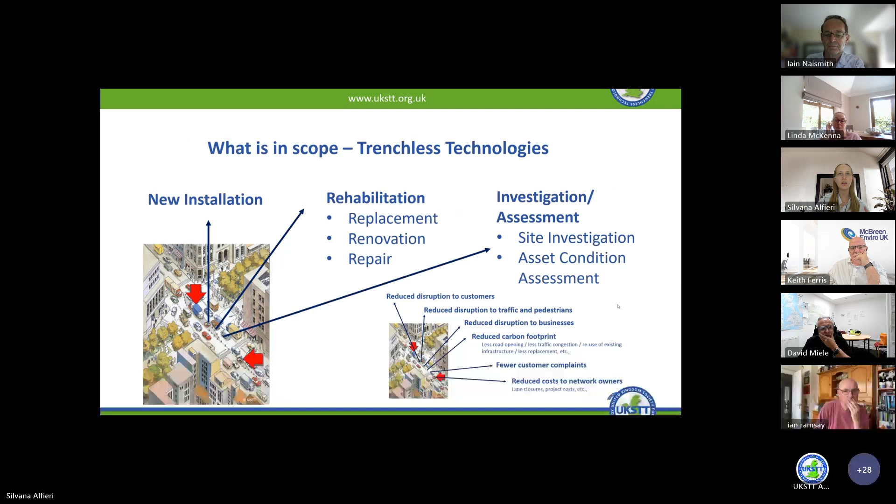So what's in scope for Trenchless Technologies? This is a very brief overview. We've done an online bi-monthly meeting on new install, one on rehab, and today will be on investigation and assessment. So what does that all include? As you can see in the smaller diagram, all these benefits of reduced disruption to customers, reduced disruption as well.

Sorry, I think someone may not be on mute. If you could please mute yourself. Thank you, I was getting a bit of an echo.

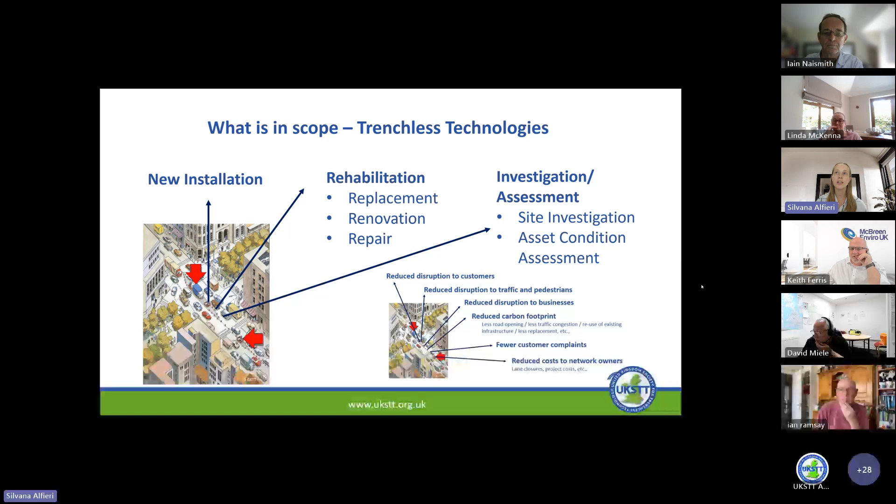Trying to think about not just the technologies, but also their benefits as well. The ISTT is the largest society that the UKSTT is part of, so this has quite an international scope. There are multiple other national societies with groups like this that we're trying to learn from and take different initiatives and ideas from. The North American Society and the Australasian Society have groups like this, so it's been very exciting to hear what they're doing. But within the UK, there's a purpose wider beyond the ISTT. If you're interested in growing your company's footprint or anything like that, the UKSTT and the ISTT are great resources for that.

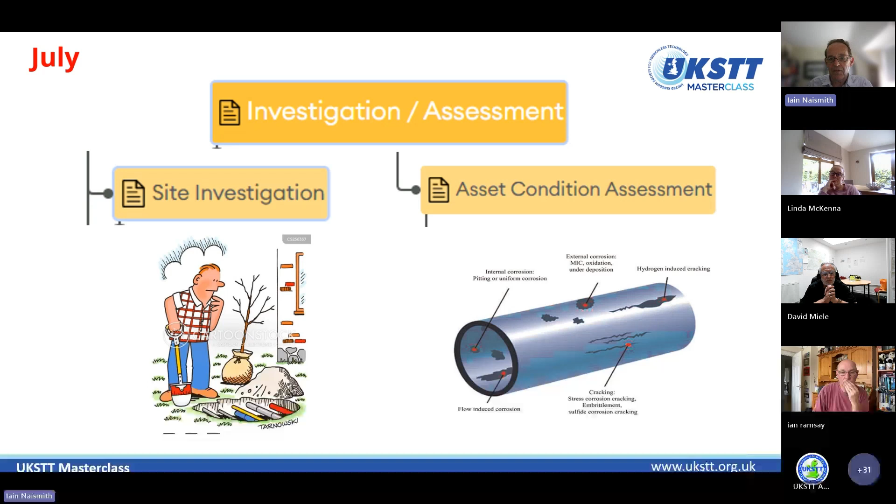One thing I'd say about site investigation, going back to our March meeting, is that it's particularly important when doing new installations - things like directional drilling, micro tunneling, and other trenchless methods for putting in a new pipe. You need to know what's there - not only the ground conditions, but where other assets are, and therefore whether it's feasible.

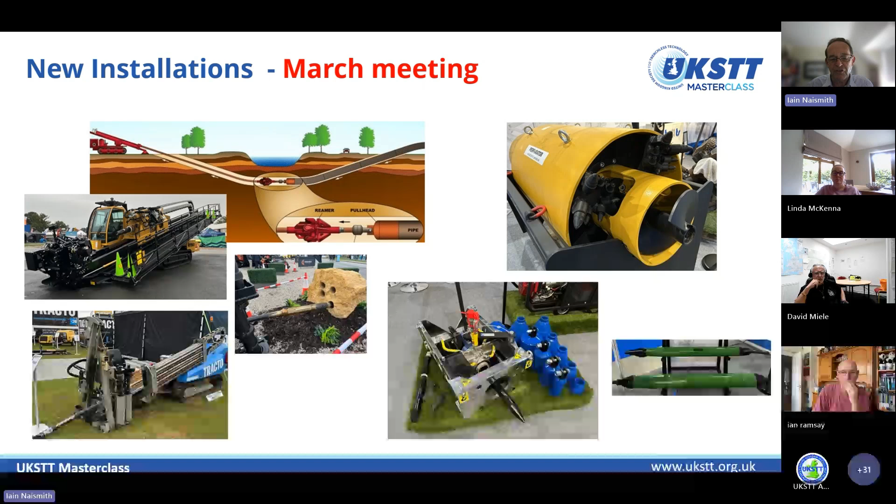When it comes to condition assessment, that is more related to existing assets, and therefore condition assessment is more about making a decision about an appropriate repair or rehab.

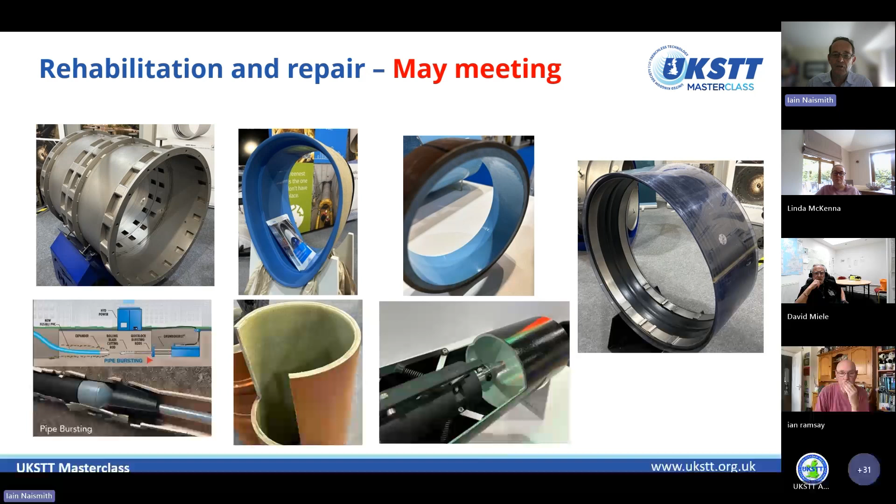Let's have a quick look at site investigation - it's about what structures or utilities are there, and what the ground conditions are. I'm going to flick through these slides fairly quickly, but they will be shared afterwards, and you can use the ISTT website to keep yourself up to date.

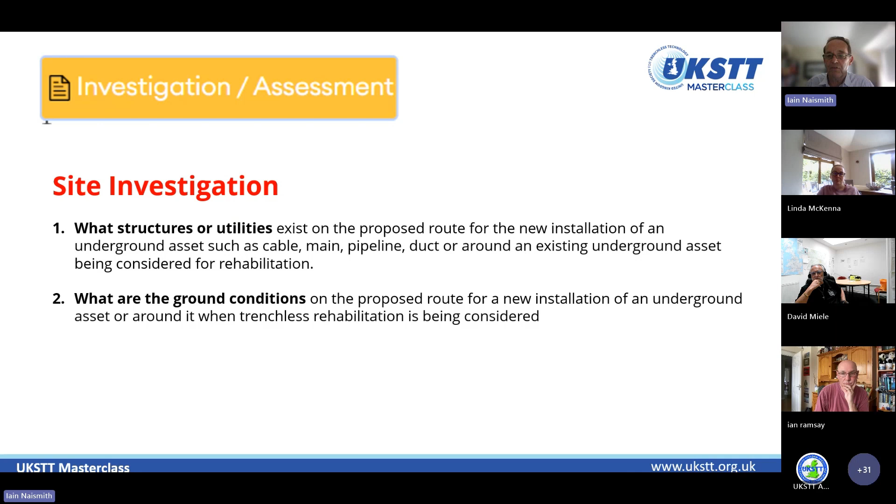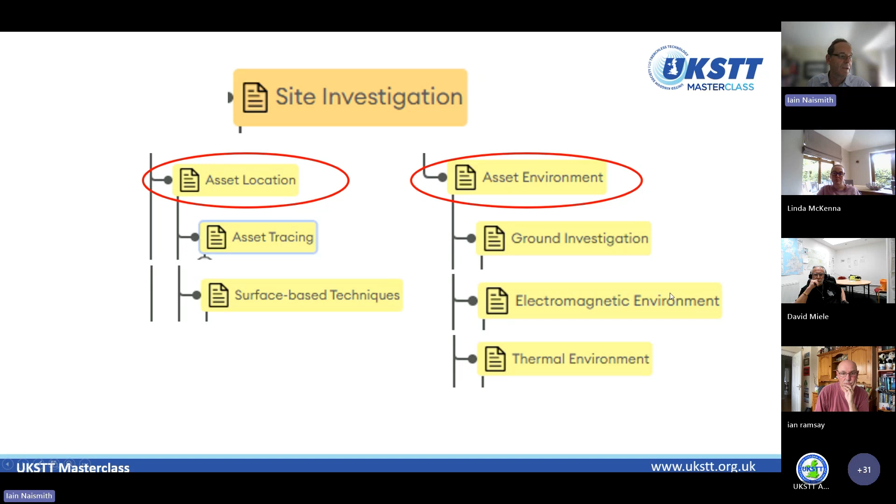When we look at site investigation, using the drop down on ISTT takes you to asset location and asset environment. The technologies are divided up under these two subheadings for site investigation. The first one is asset tracing, and there's a whole variety of methods which are possible.

Essentially we're looking at sonde techniques, where you might attach something, say, to a camera, which can determine its vertical and horizontal position as it goes through a pipe. We've also got impressed signal techniques, where you create a signal from within the pipe and detect it from above. There's a whole variety of further internal survey techniques for determining location and tracing.

We'll be hearing a bit about that when we hear about drones, for example. And don't forget smoke and dye testing - I've used dye testing to try and work out where a sewer connects into a stream before. You can also use smoke detection. So there's a range of perhaps expensive and complex, or relatively cheap, solutions.

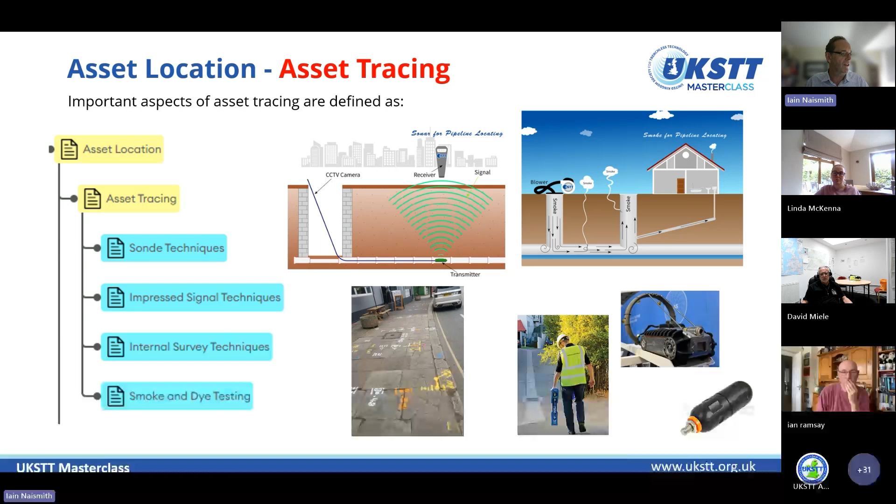So we're looking initially at asset tracing from within, but let's not forget we can search directly from above as well - we've got ground penetrating radar, seismic or sonar techniques, and a few additional methods you'll find on the ISTT website.

Let's not forget, say we're going underneath a river with a new installation - we want to know something about this water body, so we're actually tracing, in this case, where the surface of the ground actually lies. We've got a variety of other ways using seismic or electromagnetic signals to determine what is going on, and remember, at this stage, we're talking about finding where things actually exist.

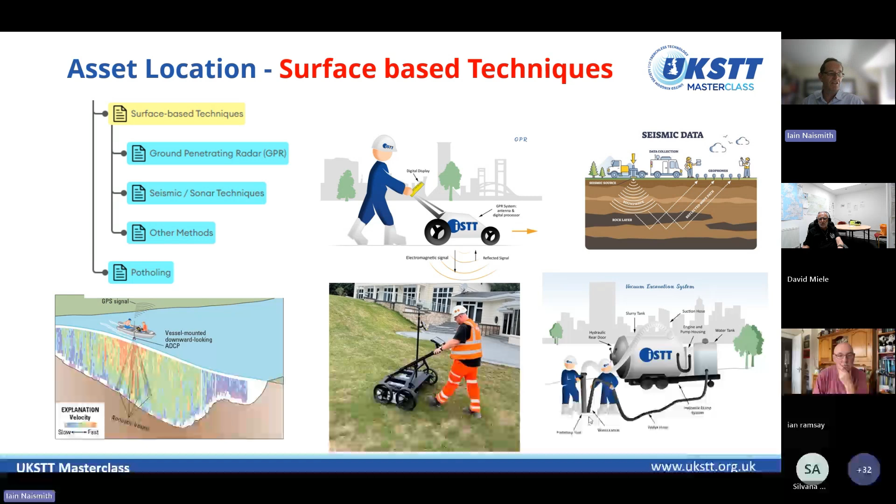The ISTT has included potholing or keyhole as a method of getting in to find the location of an asset, going down with something quite small - so it's less trench, not trenchless - to locate where something is.

If we then look at asset environment, ground investigation - we've got geophysical, geochemical. Let's remember we're interested in the chemistry because it may determine what type of pipe product can be used, and it may be necessary to do some soil sampling to come up with the answer. So here we're potentially looking at things like coring to understand what is under there, and this will determine where it's perhaps safe or easy to undertake a trenchless technique.

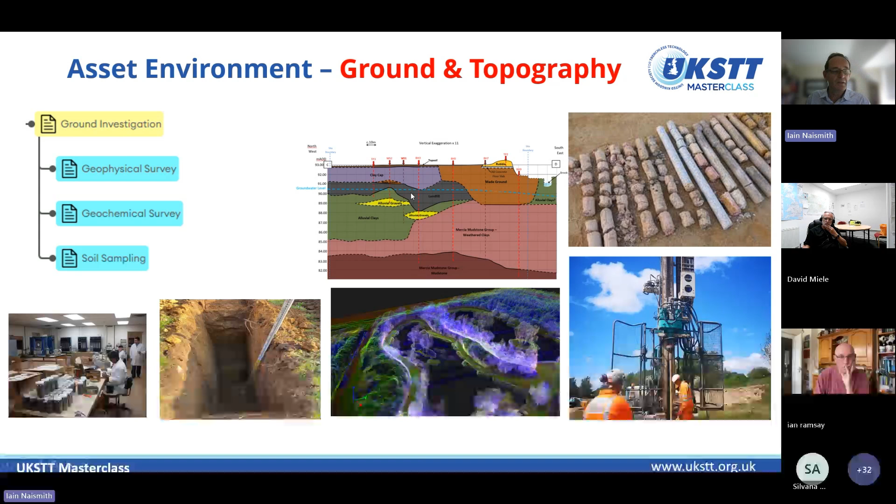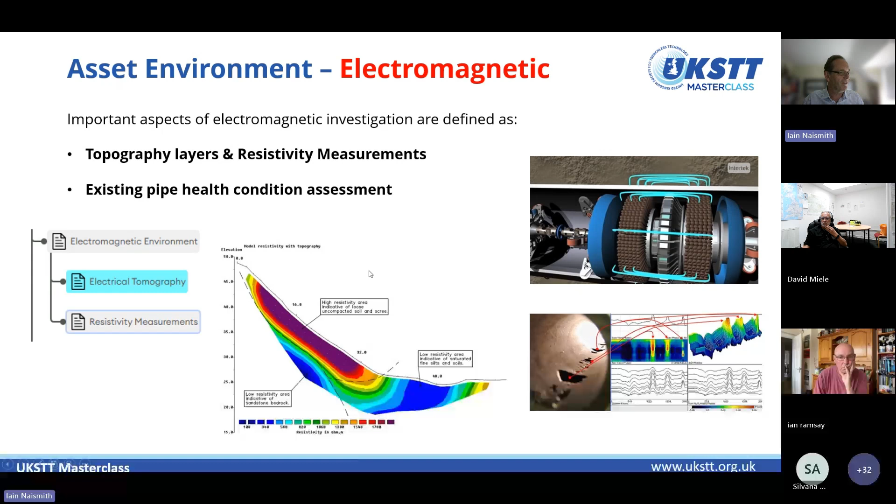So just a little bit more detail on this. We've got things like electromagnetic survey, which allows us to both do topography, but also to do perhaps some assessment of the condition of the pipe. And this can be done from the inside and from the outside of the pipe.

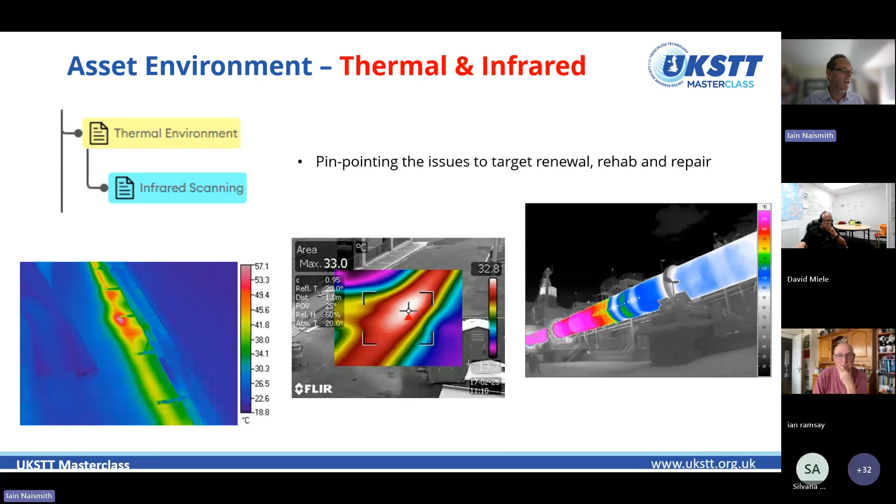Still under this site investigation, the ISTT has groundwater monitoring. It can be an extremely important element of this. It may be that you actually need to install additional wells in order to monitor groundwater, particularly if you're dealing with a particularly severe infiltration issue, and you want to choose a time of year when conditions are best for doing the work.

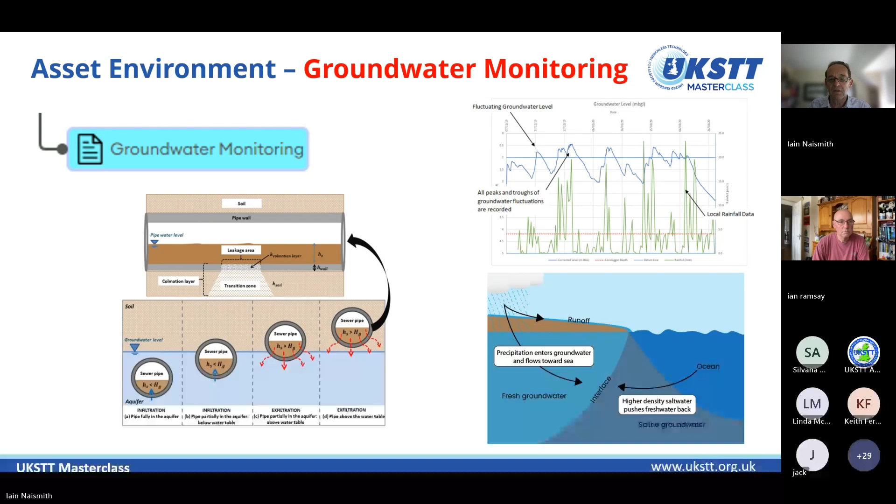And you can put all of this together into mapping. Let's just remember that you can use multiple techniques to come up with the answer when investigating a site. It could be that you're looking at something which is many kilometers long - don't forget that when you look at some of this mapping. A variety of techniques in order to locate where existing assets are, but also to identify what the conditions are if you're planning to lay something new.

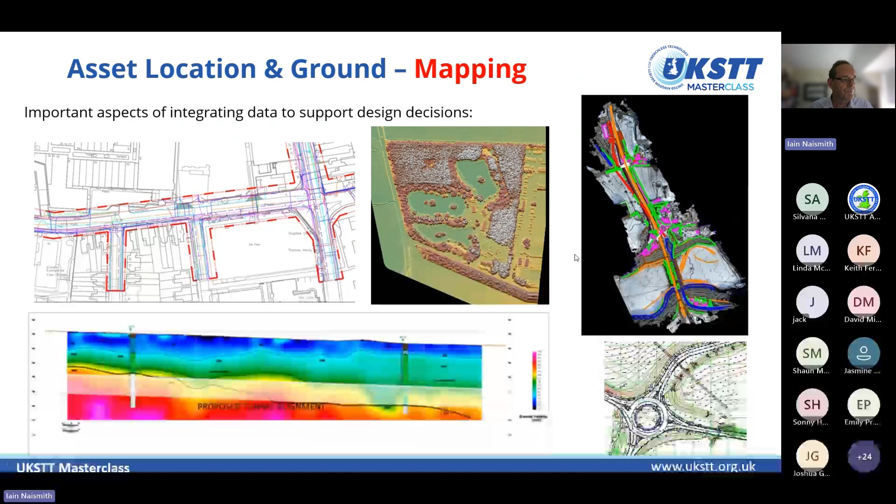structural condition assessment, and operational performance. Let's not forget at the end that you might want to know how the asset is performing as well as its actual structural condition. So is there infiltration? Is there leakage going on, for example?

So the scope of condition assessment is quite wide. Maybe the most common one, of course, is collecting and interpreting visual images. But increasingly now, people are realizing that visual images alone are not necessarily everything you need, and that there may be other ways, rather than making it visual, of recording data and information. So let's just be aware of that.

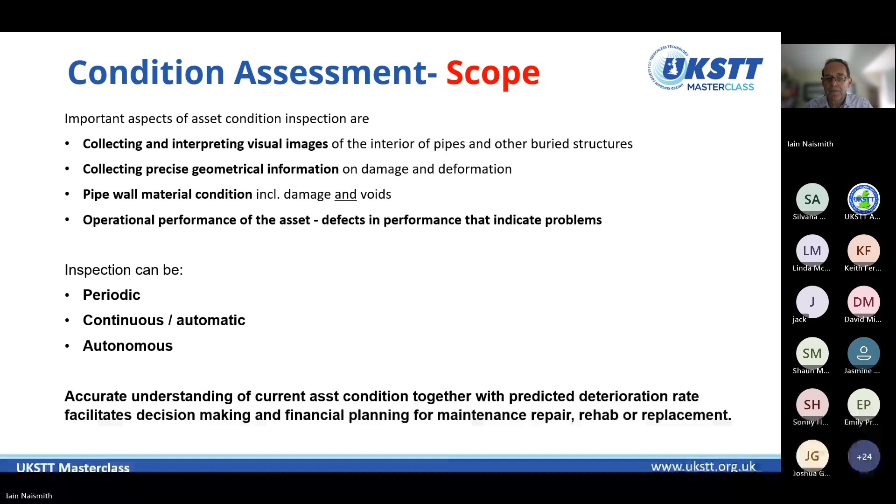So if we look at condition assessment more generally, we start off with the inspection application. The choice of method you are using will very much depend upon the purpose of the inspection, but also the type of facility the inspection will take place in. By type of facility, I mean what material it is made of, what are its dimensions, what is it carrying.

Something often suggested, and highlighted by the ISTT, is a preliminary investigation. Budgets are limited, so it may be necessary to do something simple as a quick look, which then might lead into a decision about a more detailed condition assessment and use of perhaps more expensive techniques to help justify why you might do it.

So the most commonly used method at the moment is CCTV. And CCTV, of course, comes in various forms. You can do large diameter inspections, and you can also do very small inspections using push cameras.

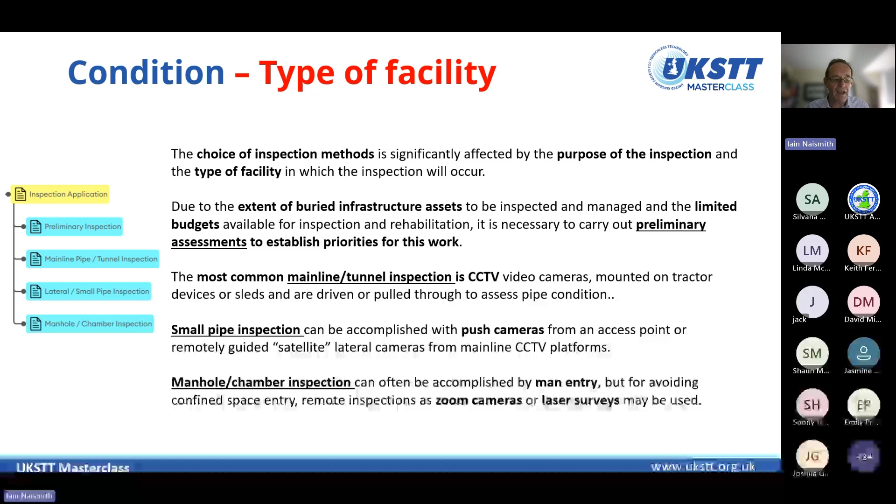One or two of the water companies are starting to think that way and starting to invest in equipment to allow their staff to do that. So looking at these, we've got visual laser inspection - CCTV, zoom cameras, nozzles, and laser and LiDAR. In the following presentation, we're going to hear a little bit more about the use of LiDAR.

Normally you're looking at something like visual images or line of sight scanning methods, and usually an operator will be in direct control, but as I mentioned before, increasingly we're starting to see automatic data capture and more AI coming into this, which is something we need to bear in mind. I think this whole condition assessment area is where AI, as we know it's been developed for CCTV, is going to help control the way in which the actual surveys are carried out.

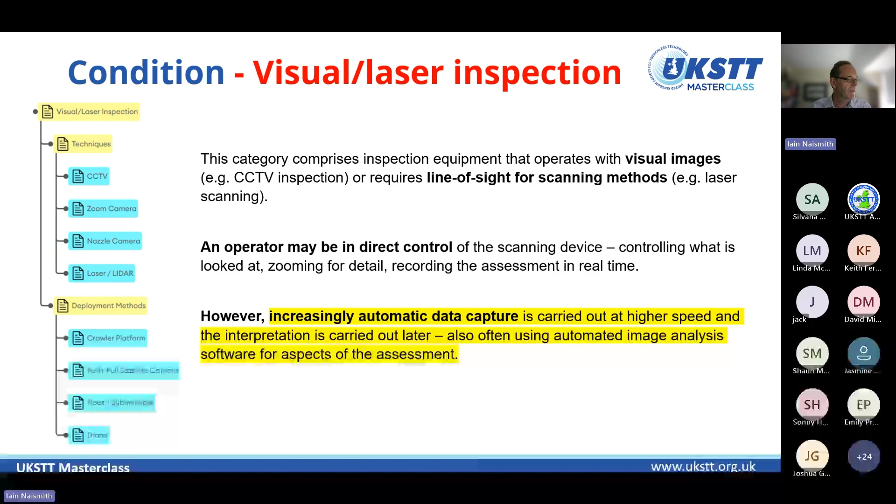So with CCTV, basically you've got a camera and some form of transport for that camera, connecting cables, recording equipment, monitor, software, capturing what has been seen. Either the operator or artificial intelligence can be used to create the coding and the records.

You may require some pipe cleaning before CCTV inspection. Let's bear in mind, cleaning is here in this particular list, but it is and can be an essential prerequisite for undertaking a condition survey. And just another point here about lighting - with visual it can be a key issue, but not so with other types of survey.

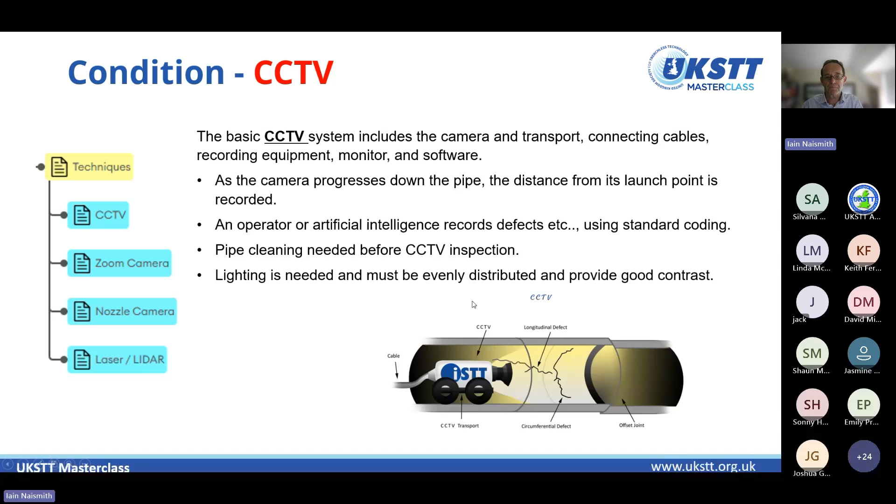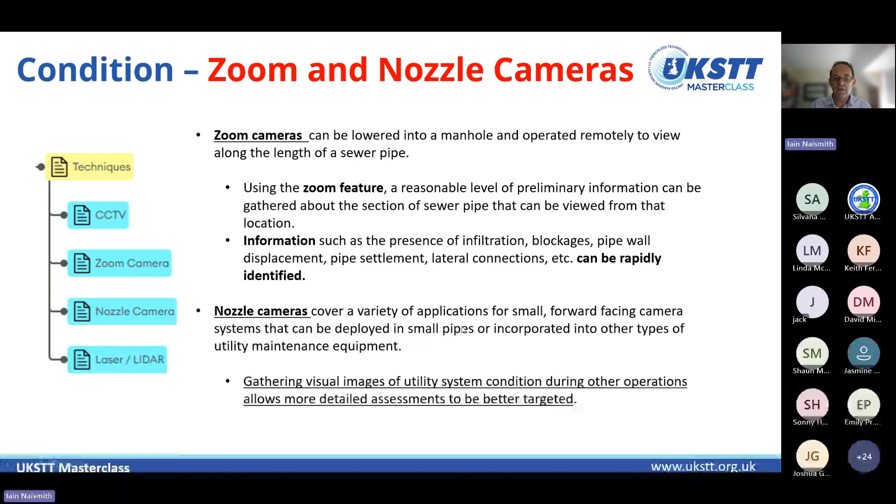With the zoom cameras, I've already dwelt on this, but they get a specific mention here, and it does allow preliminary information to be gathered. It might tell you there's some infiltration, some blockages, pipe wall displacement rapidly identified, but you can really only look from a point of access up and down - you would need something else to get round a bend. These small forward-facing nozzle cameras, which can be pushed through, are also given a separate entry within here.

And when it comes to laser and LiDAR, this is particularly helpful for pipe dimensioning. I've mentioned earlier about locating the position of the pipe, which we need to do, but actually using laser LiDAR in order to get a very good profile - the dimensional analysis will allow you to design a solution, particularly if you've got things like changing diameters or unusual geometries partway along a pipe section.

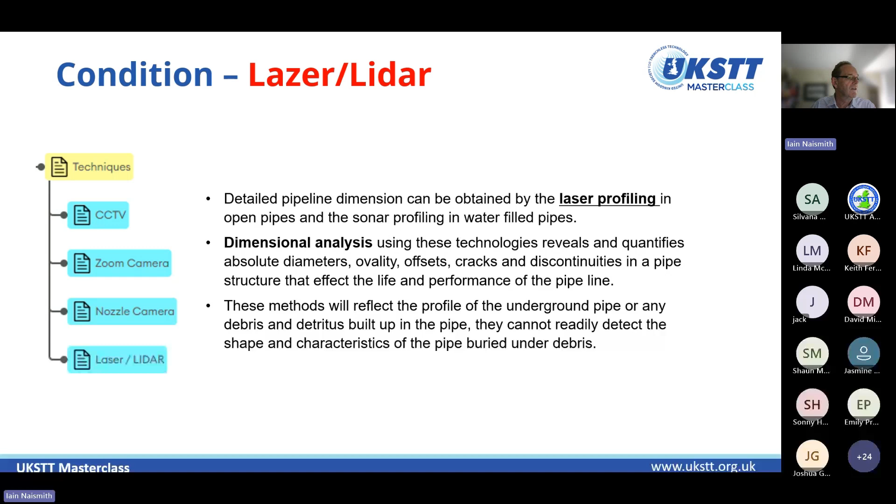With both the visual and the laser, just a reminder that there's a whole range of platforms upon which they are carried, and this is something you need to think about. It's all very well that we've got a survey method, but how are we going to deliver it?

We've got the crawlers, the push and push-pull inspection, satellite cameras - so you're trundling down a main pipe using your camera, and you see something in a small lateral which you want to look at, a little satellite camera can go off and have a look up that. And let's not forget the floating platforms, which can be used. There are now submersibles - we think a lot about floating, but there's submersible drones for getting down under the water level and looking in structures, say, for example, big underground tanks.

Drones flying through - we're going to hear about the autonomous element of it. So will it be possible to have autonomous floating boats, drones where increasingly AI is being used to help fly them? So autonomously flying drones and autonomously moving robots.

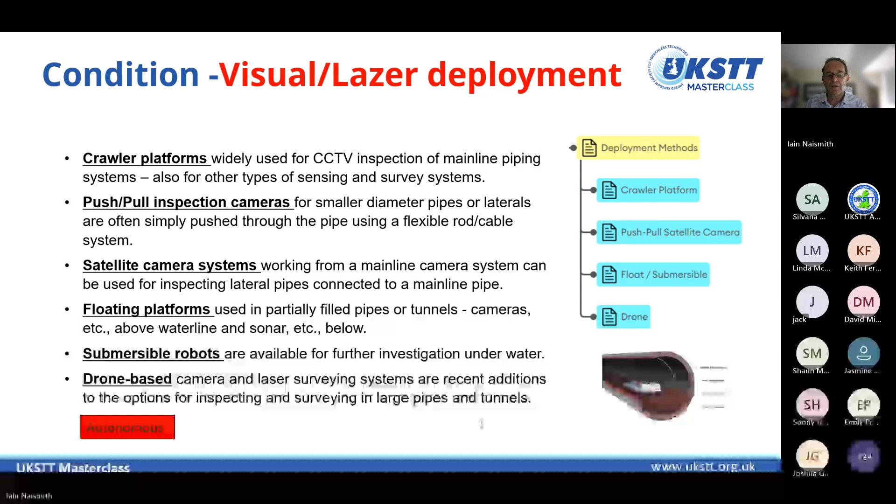So much for the visual. We've then got structural. Under here, the ISTT divides it into wall condition and thickness sensing, structural sensors, and determining external voids. It's one thing to know what is happening with the pipe, but to know if there is a void around the outside of it, which is either influencing and causing a problem, or could potentially cause a problem and therefore needs to be fixed, is an important part of it. So it's going beyond the pipe itself.

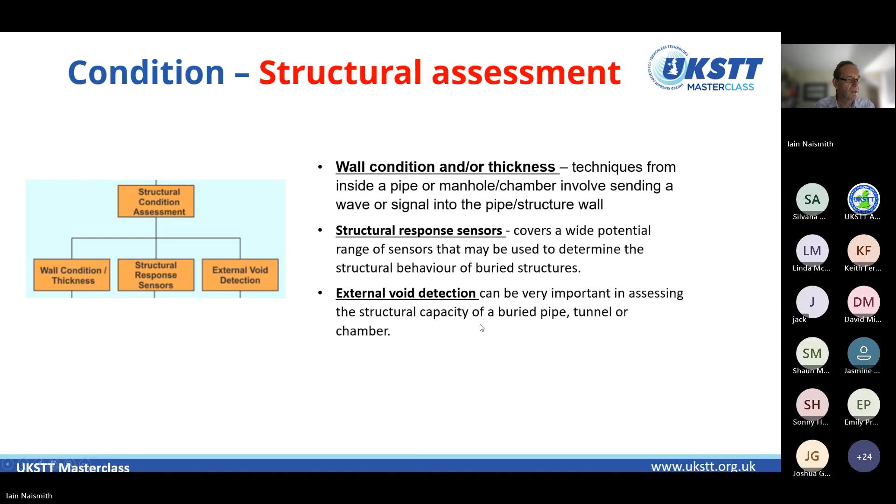With wall condition thickness, we've got a range of ways of doing this, but essentially what we're trying to do is get reflections and refractions and wave disturbances from generating a wave, be it electromagnetic, acoustic, infrared, or nuclear, using radiation sources. The nuclear bit here is basically every time we have to go and have an MRI scan or whatever done to us - they're using nuclear methods, and these methods can be used for assessing the condition of infrastructure.

So a selection of purposes which can be applied in different situations. The electromagnetic, for example, is used in critical high-value pipelines, such as oil and gas. The acoustics - the simple way is to get down there and whack it with a hammer and listen, after all it's what they do on the railway lines. But you can do it as simply as that, or using calibrated impact of a metal ball. Increasingly, acoustics are being used in instruments fitted to crawler cameras and other methods to determine, for example, where leaks are.

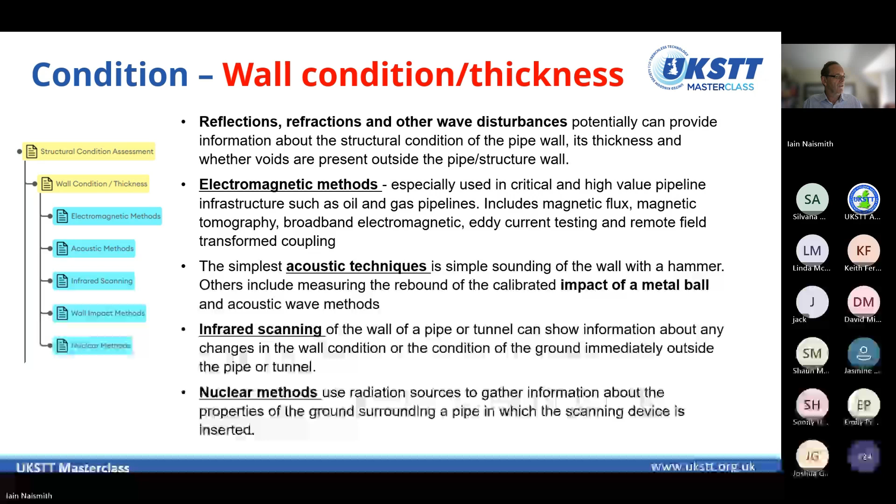So that was wall condition and thickness. And then there's structural response sensors. Let's not forget, a bit like putting a bit of tape across a crack on a wall of a house to see whether it's expanding and see if the piece of tape breaks - this is the sort of thing we can be doing. So where personal access is available, you can have discrete stress-strain sensors attached to the inner surface, and we can be using crack width gauges, strain gauges, etc.

Acoustic comes in again here. Fiber optic can be used - it can detect stresses and strains. ISTT considers that this is a particularly promising area for the future, and that they're expecting to see further developments coming along.

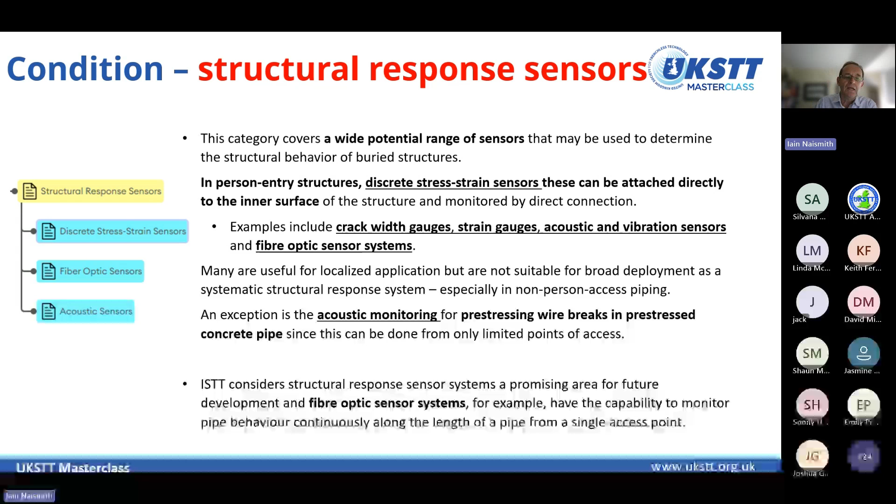Getting towards the end here, we've got external void detection. This has already been covered to some extent under site investigation, but here we're looking particularly close in - we're not looking at what's going on with the soil around, we're looking at what's happening around the pipe. So again, the ground penetrating radar - you can use in-pipe ground penetrating radar - the infrared scanning, ultrasound, and the nuclear methods again, in order to try to determine where a void may exist or whether a void is suspected to exist. Obviously particularly where we get these cave-ins in sewers or formation of sinkholes, this is the type of thing that people are particularly interested in.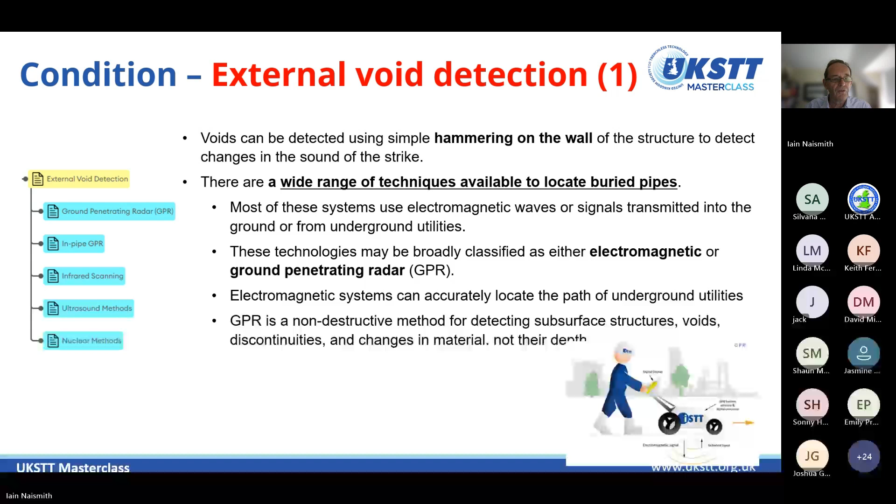So we've got ground penetrating radar, which I've mentioned, the two types. We've got infrared scanning, ultrasound, nuclear. This is for sake of completeness. If you're looking at these slides afterwards, I've picked out some of the examples.

For those who have not used the ISTT website, I should have mentioned that when you click on one of these, you get a description, in some cases a diagram, and now also a list of ISTT International Society for Trenchless Technology members - corporate members of the 28 societies that can perform a particular technology. You also get a link to any existing papers on the ISTT's library related to that topic.

So in theory, you could click on ground penetrating radar, get a description, get a diagram, see a list of who actually does it. That might give you some peers to contact. And if you want to do more research, it will link you to any existing papers amongst the 2,000 papers that the ISTT has on its website.

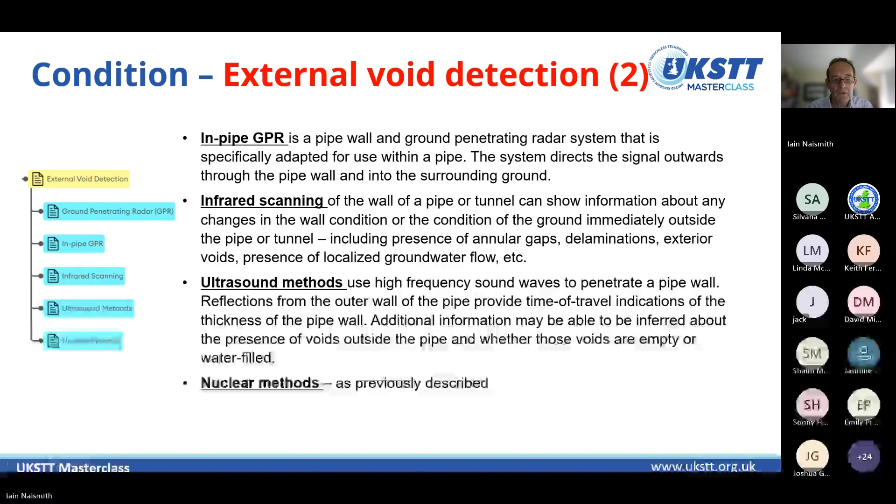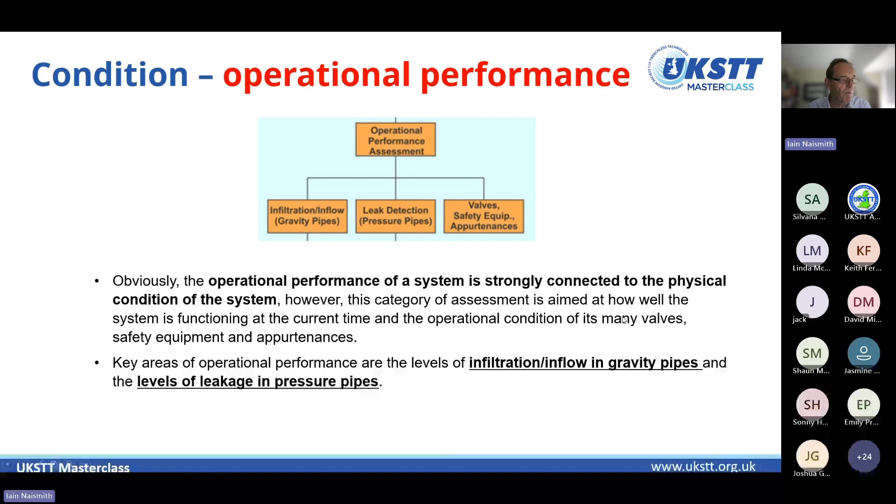If we're looking at infiltration and inflow, we've got flow monitoring, also flow quality, chemical biology. One reason for that is, particularly if you're dealing with industrial wastewaters, chemical plants, sewers, or drinking water, the quality of what is flowing may well relate to the condition of the pipe. There may be a particularly noxious or corrosive situation. And let's not forget about gases, airlocks, etc., accelerating, say, hydrogen sulfide attacks on concrete.

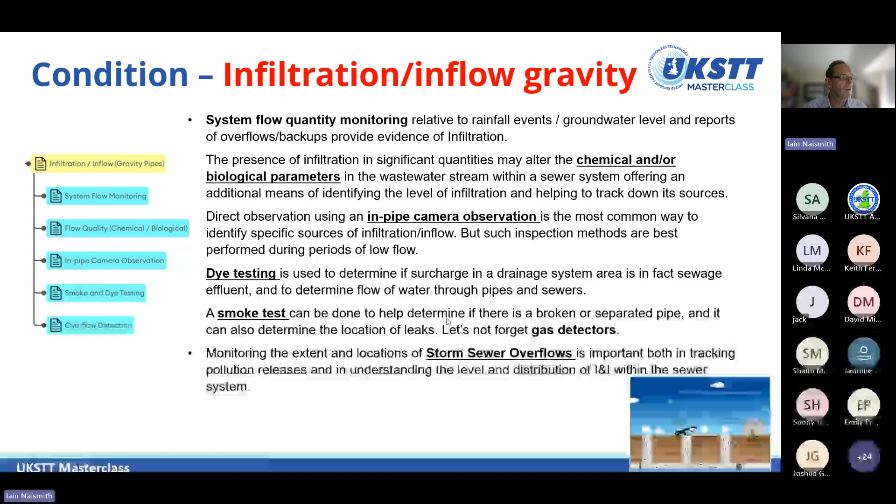So we can do flow monitoring, we can monitor quality. You could have some in-pipe camera work, or maybe permanent cameras operating. There's smoke and dye testing again, and also just detecting overflows - the performance of storm overflows is an aspect of condition assessment. So when they are operating when they shouldn't, you know something is wrong up the system. All of these fall under trenchless methods for determining what is happening with operational performance.

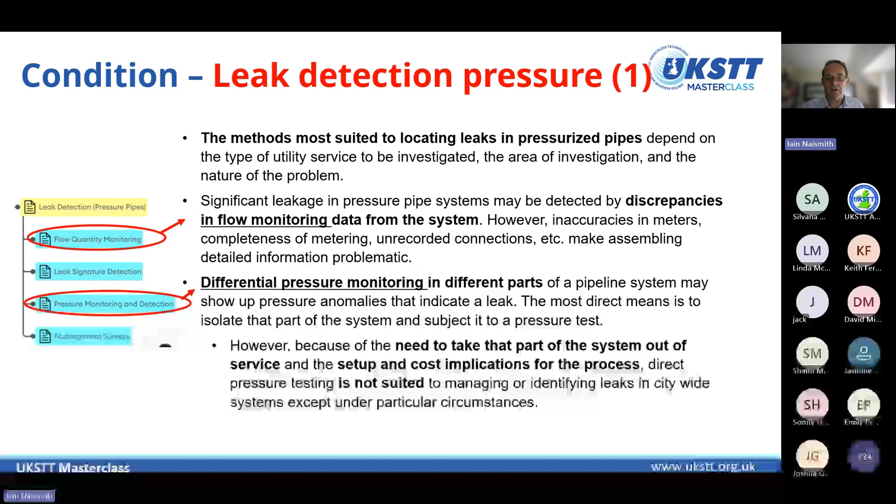And leak signature detection, for example using acoustics - you can do this as surface surveys, or within the pipe. Of course, one of the earliest trenchless techniques still used is where you see the guy walking down the street with his little listening device that he puts on the road, puts to his ear, and can actually hear what is going on under the ground. The most basic technique for discovering where a leak might be.

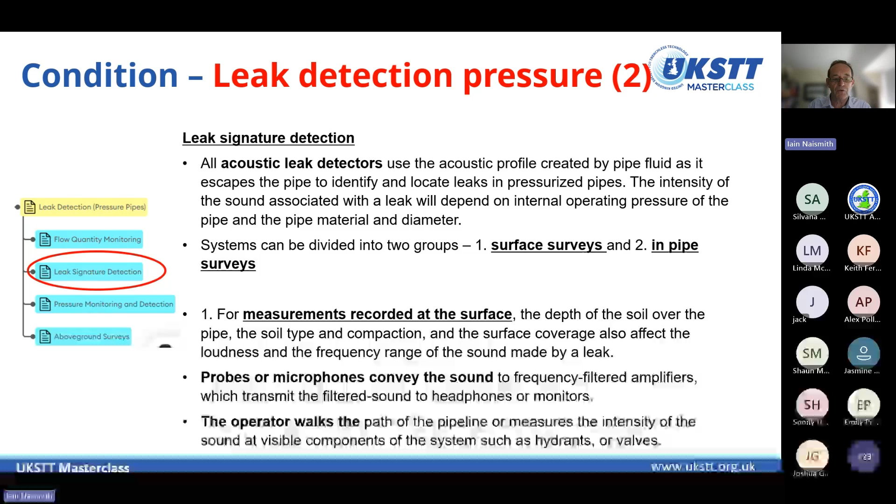Probes, microphones, operator walks along a pipeline. So a trenchless technique is literally to walk along the surface and look for a leak, or use something like a drone or some other method. Let's not forget, particularly with dry conditions at the moment, how is the vegetation responding in the area around where a pipe is known to go - this will indicate whether there's a leak present.

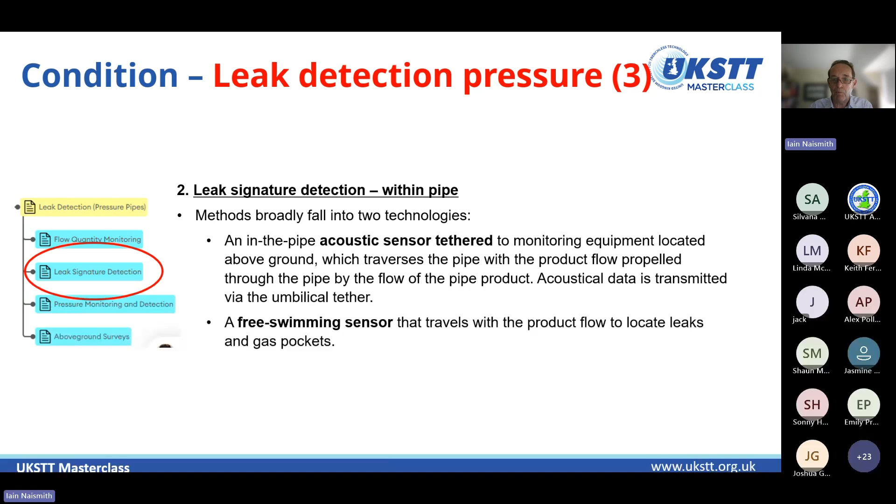So I've got down here detection within the pipe. This is perhaps having a tethered acoustic system, equipment, or a free swimming one. A couple of ways of applying these: quite often, particularly where a pipe is still flowing, you can use a parachute to drag your instrument down through, or it might be a free swimming one which is just dropped in and travels along the pipe carried by the flow, sort of a smart ball or something along those lines.

I've already touched upon this with the above ground surveys. You can look for thermal effects, vegetation changes, presence of chemicals. Another technology is training a dog to sniff out the smell of chlorine or gas - that's another method being used. This emphasizes again you can use aerial, vehicle, foot or traffic surveys, and perhaps discrete monitoring in locations where you're expecting something to happen.

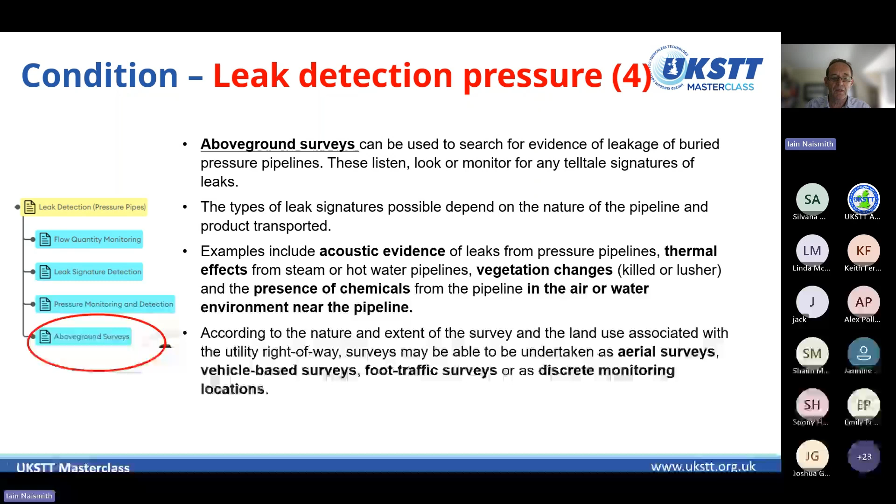Finally, the last item on the list is that there's a whole variety of operating components, monitoring and safety systems, and as part of the operational condition these should be looked at. For those who've had anything to do with pressure sewers and rising mains, there's an awful lot of occasions where, for example, an air valve is not functioning any longer, and it becomes one of the reasons why the system is failing. This is one of those operational things that should be looked at. Physical examination of a manhole where you can see evidence of corrosion implies there's an issue within the pipe which should be followed up.

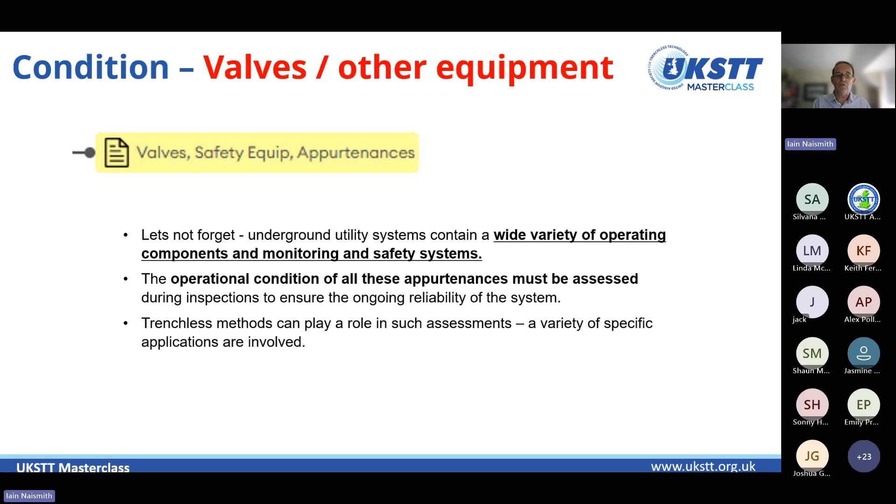So a whole variety of applications, and that has been my very quick run through of asset condition, and previously a very quick run through of site investigation. There's lots of information on all of these now available on the ISTT website. So thank you.

Thanks, Jack. So we're going to start with a brief introduction on how we at Environmental Techniques have been using drones for our surveys. Then Jack from Good Friday Robotics will chat in more detail about what's possible with drones today and share some real life examples from some projects. Good Friday Robotics actually develop, build and fly their own drone systems.

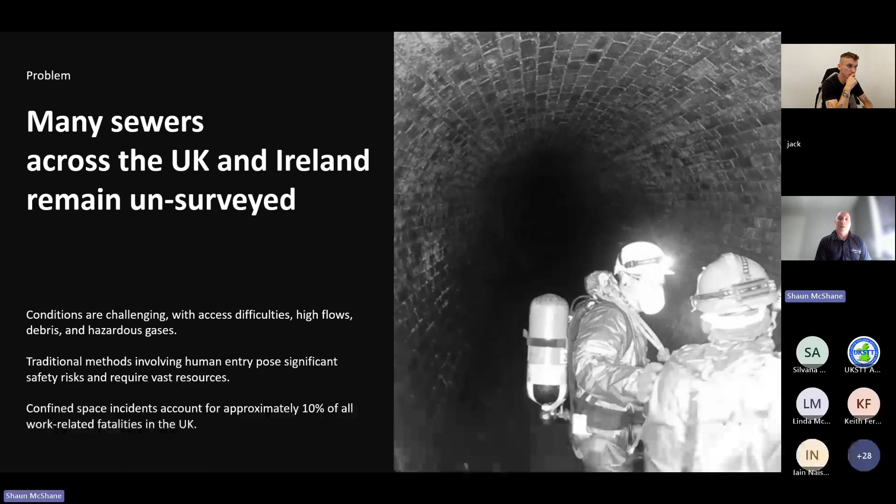There's a problem that many sewers across the globe, including the UK and Ireland, remain unsurveyed. Why? Because of incredibly difficult conditions with limited access, high flows, debris buildup, and presence of hazardous gases. For some larger diameter sewers where we find big problems getting them surveyed, traditional methods involving human entry have high risks associated with them and require vast resources and a lot of planning to make sure they are done safely. Confined space incidents account for around 10% of all work-related deaths in the UK.

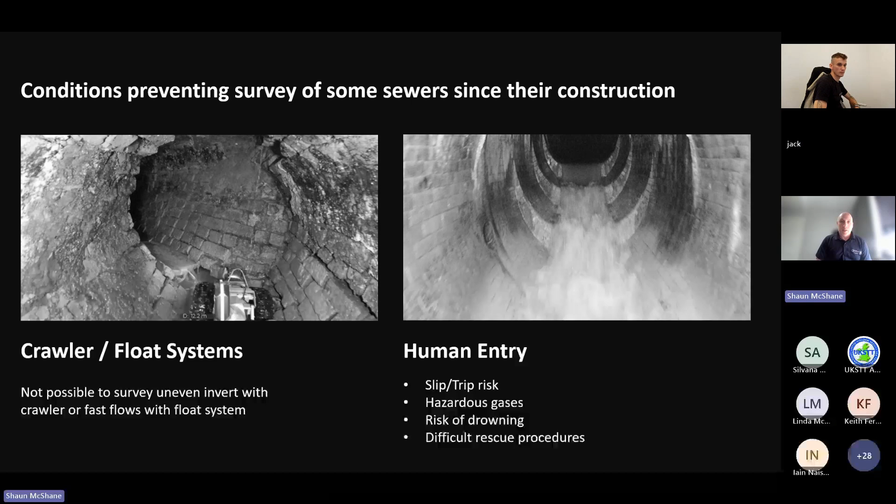Scottish Water had identified that this was a problem in their sewage network, with many of their sewers unsurveyed from the time of construction. So what they had done was approach their tier 1 contractor, Caledonia Water Alliance, and asked them to come up with an innovative solution to survey these sewers safely. Environmental Techniques, as CWA's survey contractor, were brought in to work with Scottish Water, CWA, and also Northern Ireland Water to explore the solutions.

One of these solutions was drone usage. Is it possible to fly a drone down a sewer? This was a question we put to Jack at Good Friday Robotics about 3 years ago. Jack said it is possible, but incredibly difficult. But he did accept the challenge of working with us to turn this idea into a working solution. So the last 3 years have been an exciting development journey, and one that's showing good results out in the field.

So some advantages of the drone: by removing the need for people to enter the confined space or the hazardous environment, we've seen increased safety for our site personnel. At the same time, the drone surveys can be carried out faster with better quality and better accuracy, and with fewer resources.

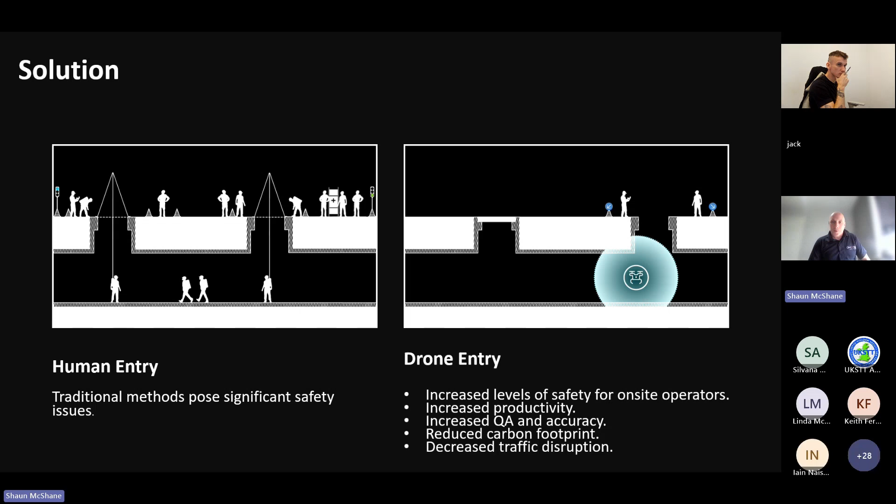Thank you, Shaun. So basically, everyone, the purpose of the aircraft is quite simple. For confined space investigation, going in to understand your asset with human entry is an incredibly dangerous task. Sending people into these assets can be incredibly dangerous, but for Environmental Techniques 3 years ago, sometimes it was the only option in order to actually get an assessment done. The purpose of the drone is to be able to go in and get a condition assessment without the need for human entry.

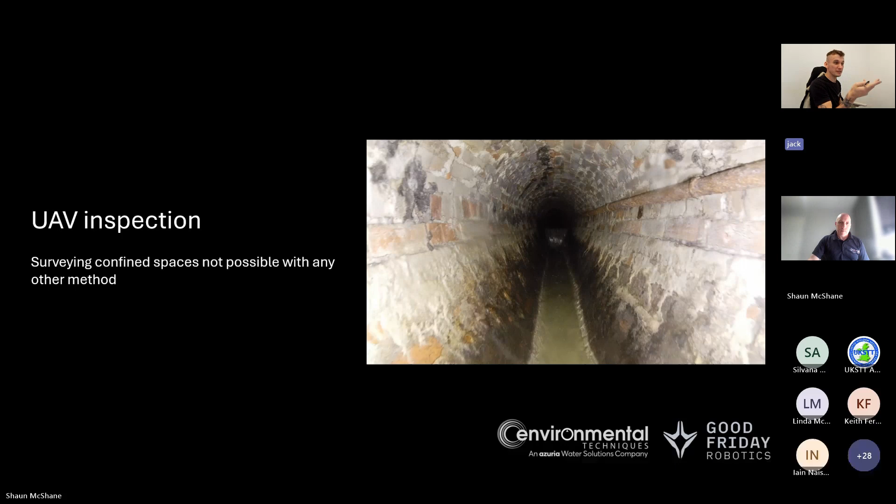There is no robotic system in use at the moment that would be able to see this little cascade here and actually overcome that obstacle - that would be a survey abandoned at that point. The use of the drone being able to do this means we're able to just fly over the top of that. So basically, what the purpose of going in and doing a condition assessment is, is to understand your problems, understand the defects, and understand where they are.

Let's pop to the next slide here. So here we have our drone flying along - this is basically what it looks like, what it does as it goes along. It's lighting its own way. What you see here is actually a survey in a 700 millimeter pipe. I'll carry on to the next slide to explain this more.

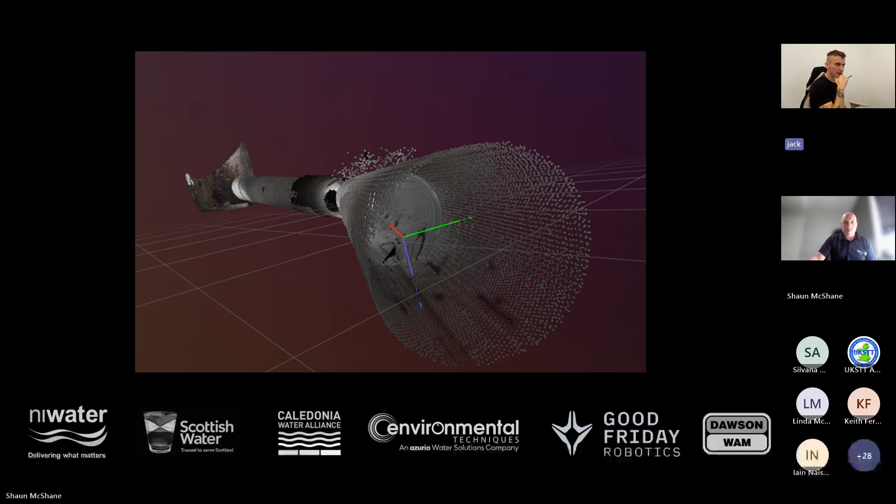So this is the LiDAR, and what the drone does as it travels. We'll go to the next slide here, Shaun.

So 3 years ago, when Environmental Techniques first contacted us, it was for these large diameter sewers that were normally done with man entry - and was it possible to create a no-human-entry system? After the first initial trials of using aircraft to survey these things, we discovered it was possible to do these large diameter sewers. The next question was, okay, can we go smaller, and can we go smaller, and can we go smaller?

Through working with Scottish Water, Dawson WAM, Environmental Techniques, Northern Irish Water, Caledonia Water Alliance, we've gradually been pushed to survey smaller and smaller pipes, ones that wouldn't even be applicable to man entry, but that were impossible to survey otherwise.

But when you get down to these ultra small diameter tunnels and pipelines, the drone begins flying within its own turbulence, and whenever that happens you start to get a very unstable system. This risks crash, risks loss of the drone, risks the drone going into the water.

So stability systems needed to be designed. Basically, how we designed these stability systems is we had to work out the position of the drone within the actual pipeline in 3D space so that we could apply stability techniques to keep it in the middle of the pipeline as it does a survey.

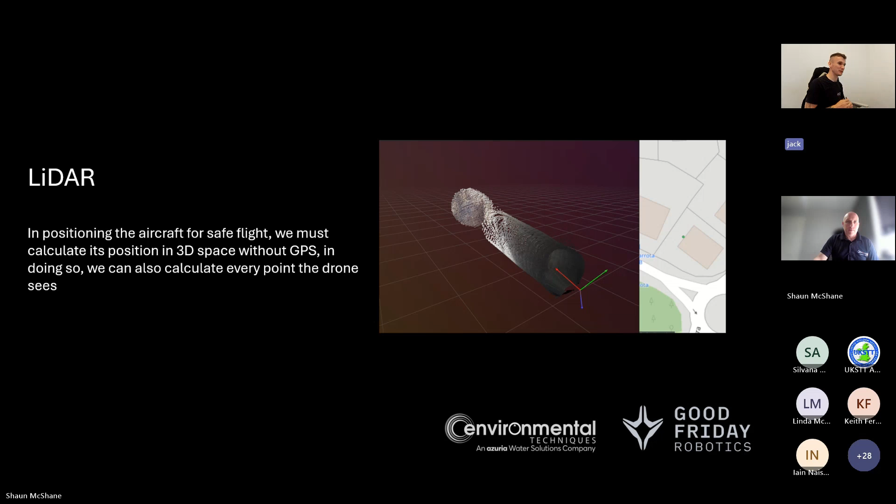But if we go to the next slide here, Shaun. What this allows us to do is each frame that the drone sees can be overlaid on top of each other in order to create a full 3D digital twin of the asset.

So what you're seeing here in all these images scrolling by on the screen is the point cloud product, the LiDAR product of what the drone produces as it flies through.

So basically, if you imagine the little laser measurement tools, laser tape measures that you can put down on a surface and press a button and it'll tell you 1.20 meters or something, we have those on board. But instead of grabbing one measurement with a button, it is grabbing 600,000 measurements per second and then reverse calculating its own position based upon those measurements.

And then as it goes along, 100 times a second, updating that to build up this full model. And then, of course, we get not just where the drone goes, but also all the measurements inside the structure, the asset that we fly through.

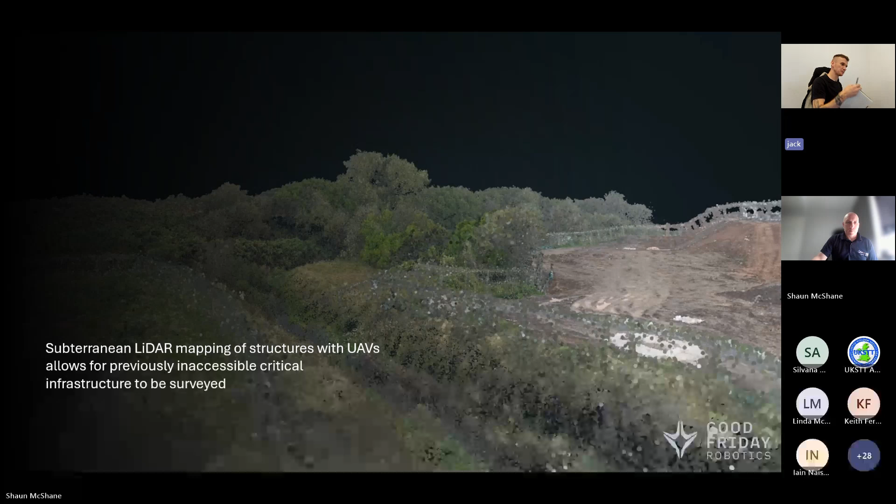So we can go to the next slide there, Shaun. Basically what that looks like is here we have a hill, which we know a sewer to be under, and then we can start to see exactly by using this method, where that sewer goes, where exactly those defects are.

As I said before, it's important to know in condition assessment, one, what your problems are, what the defects are, what exactly it is that you're doing. Is it missing concrete? Is it connections? Is it blocked connections? And the third important one is where do they occur so that rehabilitation can be done.

So we can go to the next slide there, Shaun. So there's our full LiDAR model of this asset. And then we can go to the next slide.

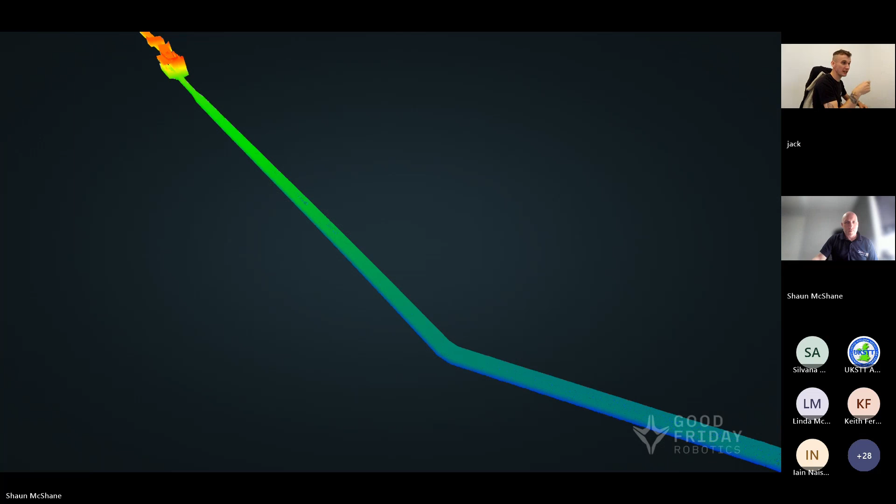And we can begin to add where exactly these defects occur, what diameters we see within them, where the diameter changes are, where the missing concrete is, what's the deviation of the line, what's the size of this line. We can go to the next slide, Shaun.

So basically, as the drone's flying through, we're taking measurements of the entire structure. This allows a full digital twin to be made, and then that digital twin can be used to measure all of the measurements that you need to take inside a structure to calculate any form of rehabilitation that you need to do. We can go to the next one, Shaun.

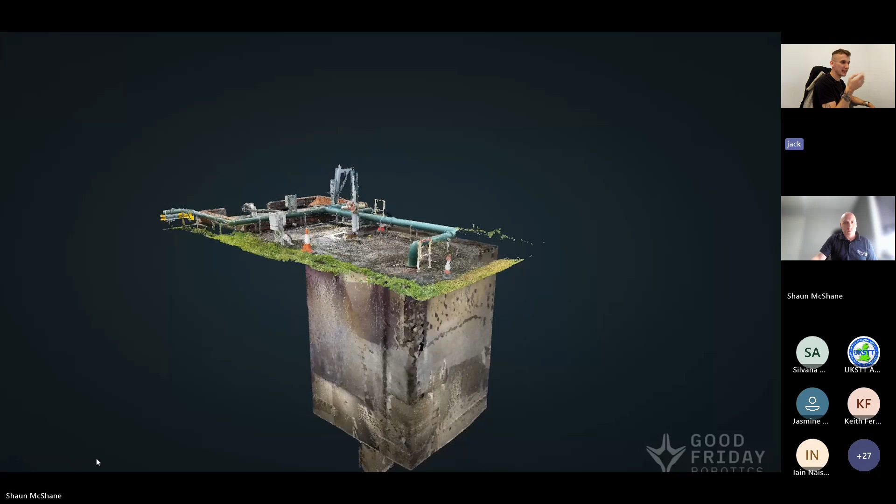So here we see a storage tank, or an overflow tank, sorry, or main collection chamber actually. So here's one of our externals. And then as we go in, we're able to get that full understanding of what exactly is going in.

Of course, we're producing a video every time of the asset that we fly through, but we're also producing these. And these allow us to go in after the fact and get all the measurements necessary to a high degree of accuracy so that rehabilitation work and condition assessment can be properly planned out. We can go to the next one, Shaun.

So the drone has to, as it flies underground, obviously we don't have access to GPS. There's no way that a GPS signal can get down into our tunnels. However, we do produce this full model. And then we can take the above ground scans that we do have access to GPS and accurate GPS, and we can align everything and fuse these models together to give us a GPS fusion.

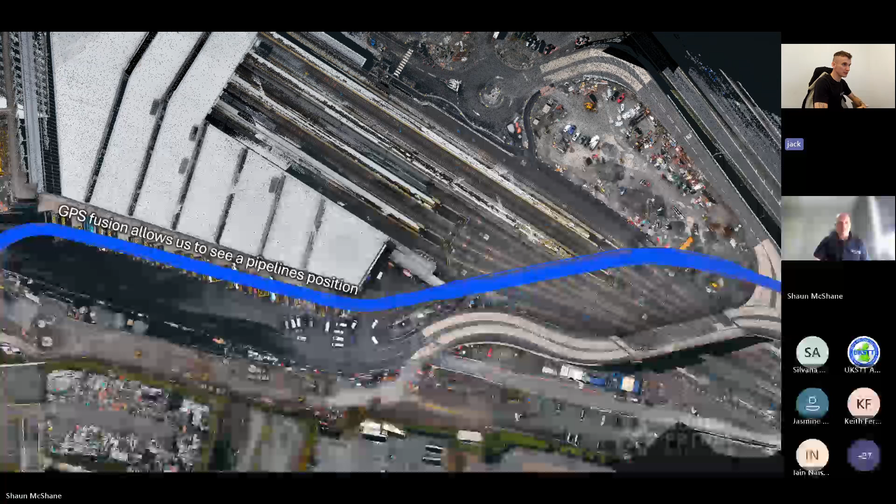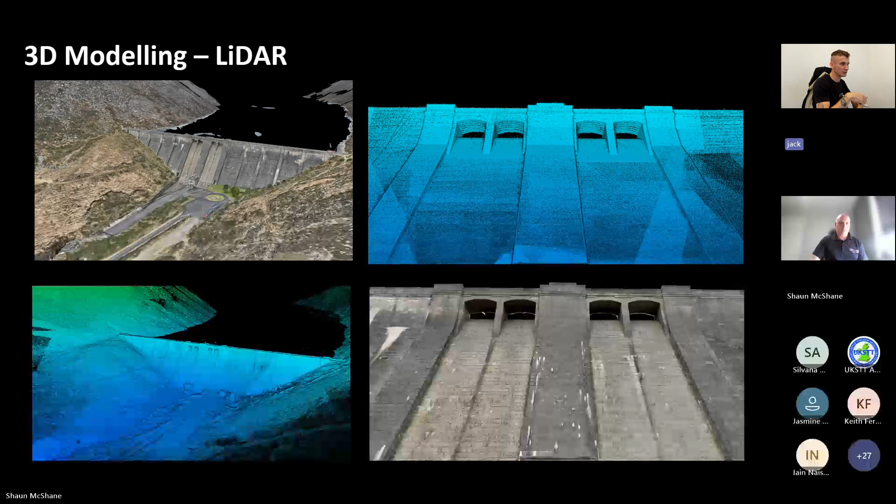Basically what that looks like is a full texturized model that gives you exactly what the condition of the concrete is as the drone's seen it, and being able to then use this to properly plan out remediation work. Because knowing what a structure currently is can be the most critical tool in planning out the next steps, the next bit of remediation, modeling the structure. That can be the most critical piece of information you can get in order to complete the work that needs to happen.

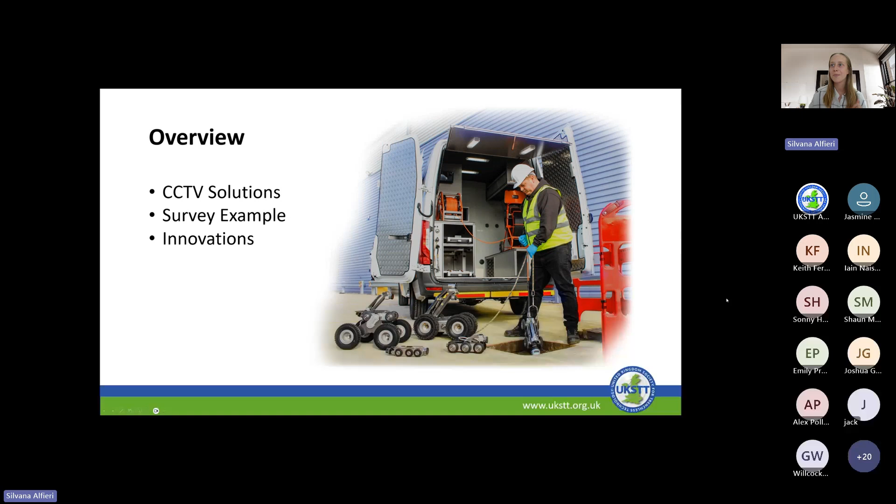And I think maybe we have someone here, I saw him earlier from VAPAR. So I don't know if he's still here, but maybe when we get to that point—I've put him very much on the spot if he's still in this call—but he can jump on and join in that discussion as well.

So Iain talked about it, but the most basic CCTV solution is push cameras, used for very short inspections, suited for that quick look-see that Iain, Jack, and Shaun have all talked about—what you need to see is going on very quickly before you decide to rehabilitate. Even if you're on the site pre-lining, you've got to see what's going on before you put the liner in the ground. So it's really suited for quick inspections, and some pest control applications as well.

It's the right equipment for shorter distances and smaller diameters. The push cameras you see here, the max length is up to 120 meters, so you can't really do long, big runs on that. But you can put a variety of different camera options on it—these are all industry ones, not just this brand on the screen. You can put cameras on to do different zoom, pan and tilt options, and some will have full reporting software on them.

So in contrast to what I just said about using it for a quick look-see, if you do need to run a full report and code on it, you can code on push cameras as well. So if that's required for the site, it can be an option.

There's also something on the more plumbing residential side, where if you just need a quick look down any sort of plumbing, you have a camera option that can connect to your phone. That's becoming quite popular in the industry overall, having more phone and tablet access rather than a control box like you see in the picture of the guy using it in the drain. If you need just a quick look, it saves to your phone—that's becoming quite an industry trend with these push cameras, which is interesting as we all become more connected.

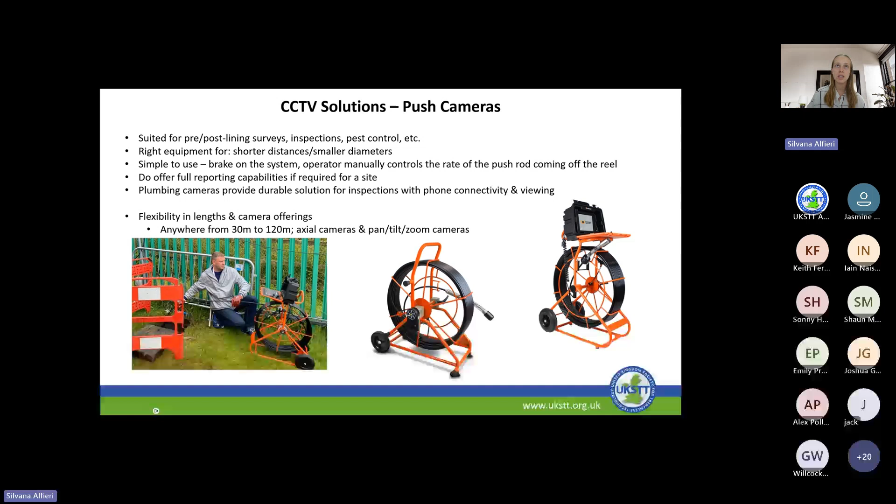So push cameras are the really simple solution. But on the other end, before you get to drones, which are a crazy cool inspection solution, you have in the middle, crawlers, and they're not fully capable, like Jack said in his video. If you came up to that stopping point in his example, the crawler wouldn't be able to go over that.

So there are limitations with crawlers, but overall they are a quite durable solution, made for a wide variety of diameters—from about 90 millimeters up to almost 2 meters in sewer diameter they can inspect. So made for those larger diameters, often storm sewer as well, are suited for crawlers.

And they're quite modular, quite durable. Almost all of the industry solutions offer wheels that come on and off, so it's not just stuck with these black ones you see in the pictures here. You can put different ones on for different pipe thicknesses, surfaces, if you have a really greasy pipe or anything like that. So they are really plug and play, to adapt the crawler solution to the pipe that you're in, that you need to see what's going on in.

A solution as well that Iain talked on in his presentation, that's becoming more popular in certain regions where you don't have as much access, are lateral inspection solutions—that's the crawler on the right-hand side of the slide. Essentially it is just a push rod on a crawler. So you can crawl down into the main line, and when you get into a lateral, or you see a lateral, you can rotate the camera push rod head on it so it aligns with the lateral, and then push the camera up into the lateral about 40 meters.

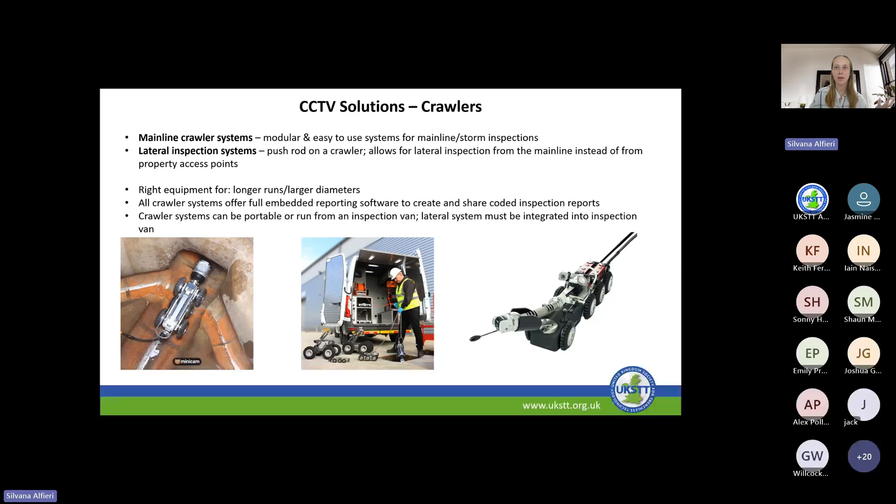They have a 360 camera on them, and lights, as Iain talked about, which are quite important in the survey to ensure that the footage is being captured visually correctly. So it's a very similar principle to either a push camera or a crawler inspection survey - you drop the camera down and...

Alex, do you have a question? I'm happy to answer. Okay, yes, sorry about that. No, it's okay, no worries. I saw the hand go up.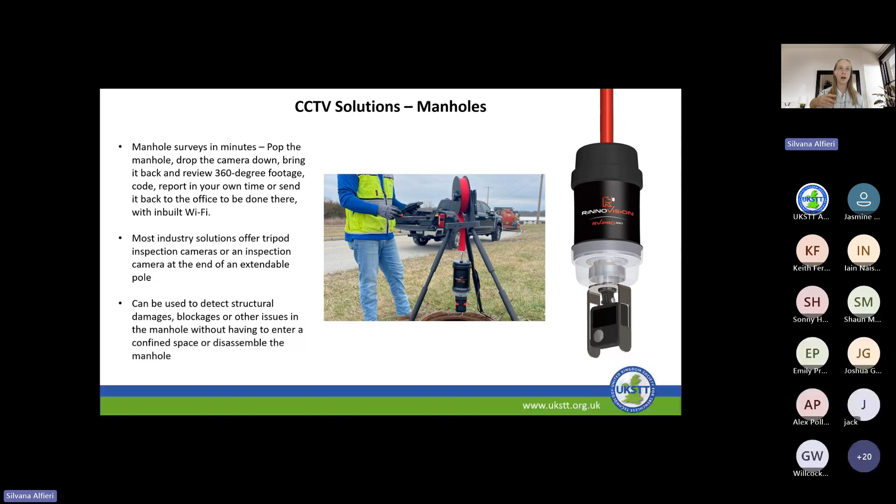These tripod inspection systems, or just straight on a pole, help detect structural damages, blockages, or issues in the manhole. As Sean talked about, it's a huge safety concern to have people enter a confined space. This manhole is off on the grass in this picture, probably in the US, but we all see manholes here that are not off in the grass, with huge traffic disruption and personnel involvement needed to have someone enter that confined space. Doing it with a camera is much quicker, easier, and obviously much healthier and safer for teams on the ground.

So another quick solution if you have that in your toolkit. Very briefly on the tips for how a survey would look, how best to run a survey - you need to make sure you're set up to succeed. There are top tricks about how to make sure access is right. With a crawler, you'll see in this picture someone using a top roller for the manhole, which preserves the cable and reduces friction for potentially longer runs. If you're crawling hundreds of meters, that's quite essential to make sure the crawler is still able to crawl at a relatively fast rate.

With push cameras, you can set up a similar thing with a small elbow of pipe to enable a smooth transition into a pipe, particularly if there's a steep bend. This helps preserve your equipment and makes it easier for you, because with a lot of crawlers you're automatically paying out, but with the push rod you are manually doing it yourself, so you want to make that as easy as possible. With the manhole cameras, as you saw, someone was using a tripod for more steady images. You can do it on just a long pole as well, but the tripod makes it steadier and easier for you.

As people are operating these surveys, it's important to be trained, but also to remember to be pipeline central. That's important, especially if you're coding, to make sure you are in the middle of the pipe to have the best visibility of it.

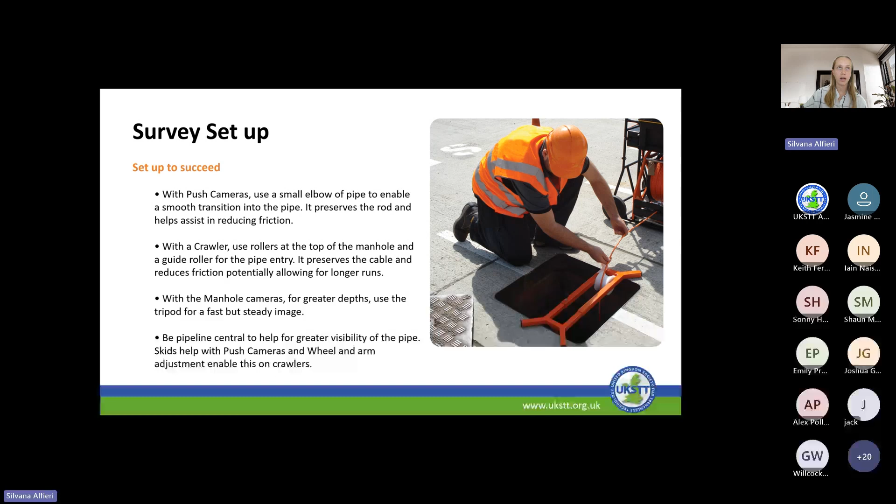In the survey, probably one of the most important things for visual surveys is your lights. All of the solutions I've been talking about have lights on them. You can also add extra lights if you're really far down the pipe, to have adequate lighting to illuminate it. And since lighting conditions will change, you can control that on your end to make sure you're illuminating what you need to.

Speed is also really important - make sure you're not going too fast, so the camera doesn't miss something, but not too slow either, to optimize your time and minimize blocking traffic or having people on site. A lot of these solutions, particularly the crawlers and lateral systems, have cruise control - a button you hit like in a car, and it crawls at a certain speed. That's helpful for straight runs or slow runs where you want to focus on condition assessment rather than constantly adjusting your crawler.

With larger cable reels, especially on a van, it's better to have an automatic or semi-automatic cable reel to help pay out that cable more evenly and consistently. This also helps prevent accidents and keeps you focused on what you're doing.

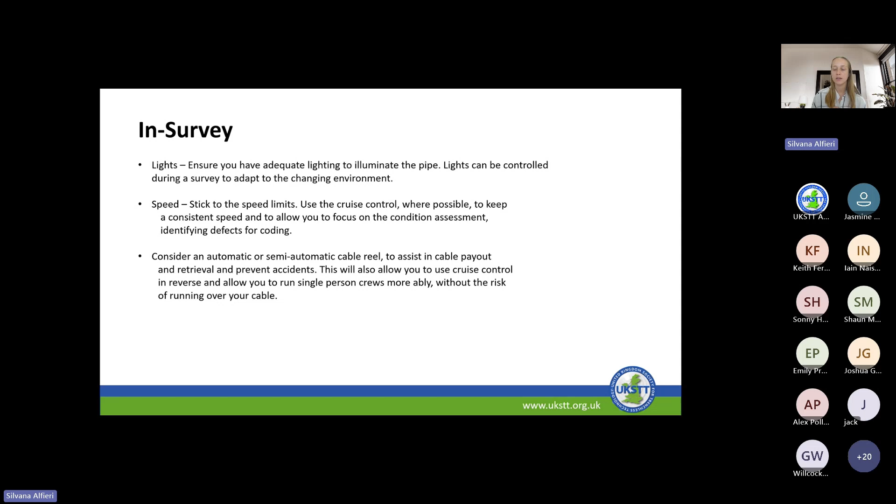An issue we see a lot in this industry - and CCTV is not alone in this - is recruiting people and making sure they're properly trained. With automatic cable reels, it's easier to have one or maybe two people running the survey, so you can focus more on what you're doing and have fewer people doing manual jobs.

In a survey, the control box - the box on the push camera or crawler - is what controls the system. That can be done either in a van on a proper PC, or on the box on the unit itself. A lot of the software, like this example we've taken screenshots from, functions similarly. WinCan is embedded here, and many other systems run off something very similar.

It'll prompt you to enter data on where you are, what the pipe shape is, what the diameter is, what the material is, and you can enter all of that in different sections. Once you go into your full report, that'll be in there as well. So while training is needed to do a CCTV survey, a lot of the newer control boxes and software make it quite easy to run through.

That's how you'll function the survey. But afterward, if you're fully coding, you can check your work on site to make sure you haven't missed anything with survey previews on this control box example - this is the Minicam Control Unit, which is what MCU stands for. You can check your survey, see what's going on, and decide if you need another quick pass or to look at something before you leave the site, because once someone leaves, you don't really want to go back.

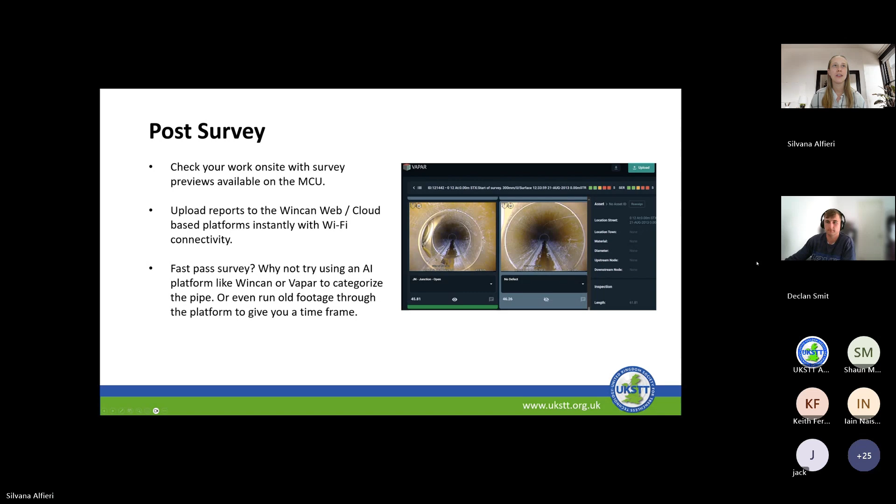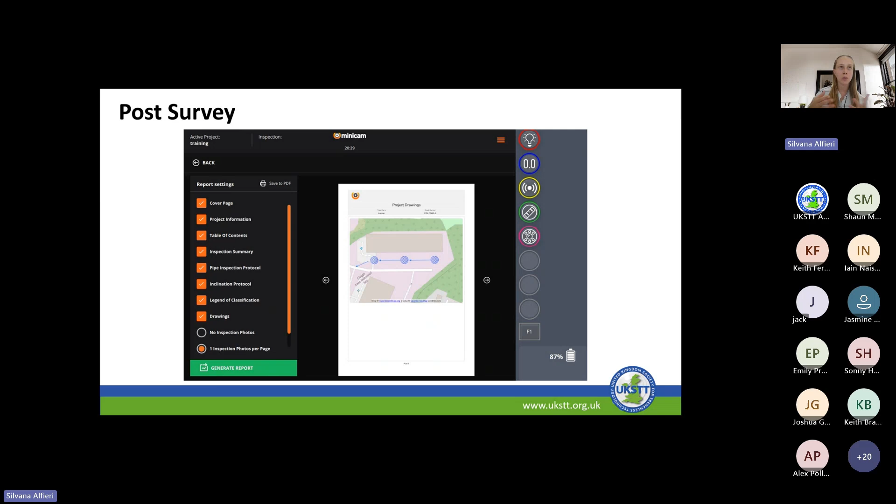If you're not using an AI-based platform, and if you're still in the MCU or any control software coding yourself, you can put project drawings in. Similar to what we saw with the drones, though not as in depth, you can map using a Google Maps integration to show where you are and where the assets are within a project drawing function. That's integrated into your report that you're handing over to whatever client you're working with. So that's just a snippet of that.

You can preview your report before you leave the site, like I said, but this is what it'll look like. There's a lot of information in here, as you can see - I think this is page 8. There are many, many pages talking about the defects, different survey tools if you were measuring inclination, or measuring with lasers or anything like that, specific defect information that would be in your survey. So very briefly, that's what that would look like.

I guess there's some VAPAR information in here. AI, as Declan said, is one of the biggest innovations in the sewer industry. VAPAR has been working with a fair amount of companies in the UK to integrate into their processes, and we've been working with them at Minicam as well. Minicam is also looking at developing a local AI function, in addition to continuing to work further with VAPAR, just to help operators on various elements of the survey.

As I've talked about, it's really important to make sure you have the speed right, the lights right, and you're positioned in the pipe correctly. As people newer to the industry come on, I think with training we can make that easier by integrating AI into the control box that says, hey, you're going a little too fast, maybe let's slow down, or hey, the camera's a millimeter off of center. Innovations like that will not only help the analysis of the footage but also help with the manual jobs in it, and hopefully cascade down to help with issues we're seeing, like recruitment.

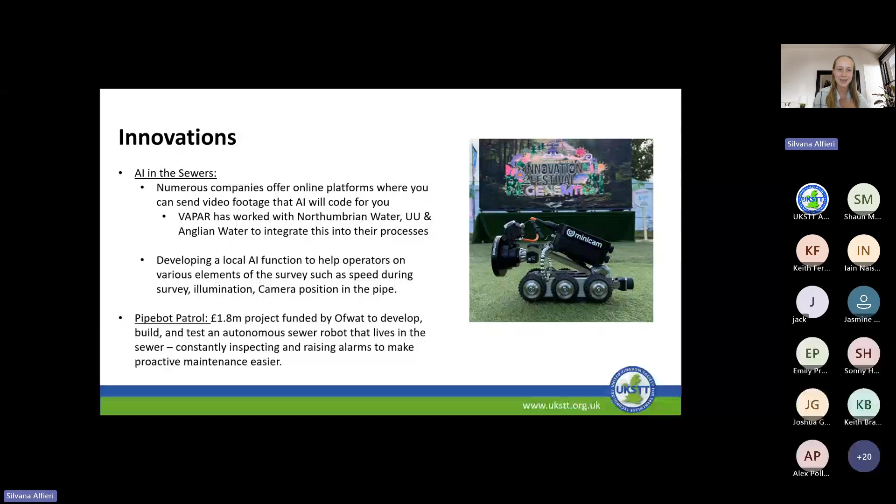So I think that is the rest of my presentation. I have no one else to put on the spot that I've seen has joined this call. Thank you very much. Like Iain said, I think we'll do questions now. If anyone has any on the presentations, or if there's been any thoughts on what else we as the trenchless industry can be presenting or sharing information on for the next couple of online meetings we have, with that, I will open the floor.

There's, I think, Keith Brazil - you've got your hand up.

Thanks for the presentation, very informative. I work for Irish Water, now known as Uisce Éireann. The problem we run into constantly is pipelines with flows in them - maybe 20-30% of the diameter of the pipe is surveying underneath the sewer water. That's the first point I make. The second is like the siphons, which are constantly full. A lot of our siphons are single siphons where we don't have the option to shut them down. So the problem we run into is how to get an accurate representation of the condition of the pipe on both of those, whether 20 or 30% of the pipe is full.

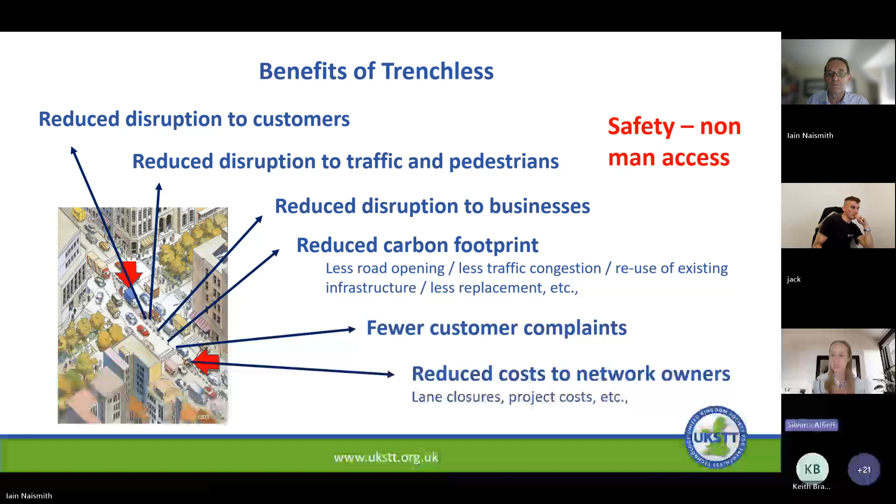Additionally, we were chatting about it before I think the majority of people joined, but we know that sometimes this might be a hard time during the day to join - everyone here has a day job that sometimes isn't conducive to a 2-hour long slot during the day. So please let us know, either come off mute now or send an email to someone at UKSTT if there's maybe a more preferred time that might work, like potentially a lunch and learn slot that we could move these to in the future, just to continue good engagement. So that's something we are cognizant of as well.

Yes, something I'd like to add as an idea - we mentioned earlier the road shows which UKSTT undertakes, and we've tried it out in Sheffield. It worked. We're going to do it in Bristol. We will be doing it in our events next year. These road shows, if you're aware of them, they are one day. We have some really interesting speakers, and you get to see a lot of kit, some of the latest stuff that's available.

And actually, if you're looking at staff development, if you're looking at your own personal development, CPD, then actually planning and taking a view of the whole year for the events which UKSTT hold - for each one, we're now going to have an afternoon event the day before. So at Bristol, it's a trip to Wessex Water. And when we've agreed shortly the events next year, we will be looking at setting up something equally interesting. You then have the opportunity to go to the hotel where the event is taking place for the night and informally network, and then you get to attend the event the next day.

So these are great opportunities for meeting face to face. These are great opportunities for networking, and they're great opportunities for just expanding your understanding of Trenchless and seeing a lot of the kit that you hear about in person. So there will be a push in 2026 to encourage people to do a little bit of traveling, and depending on how much time you've got available, maybe pick out more than just whatever is happening in your immediate local area as an event worth attending in person.